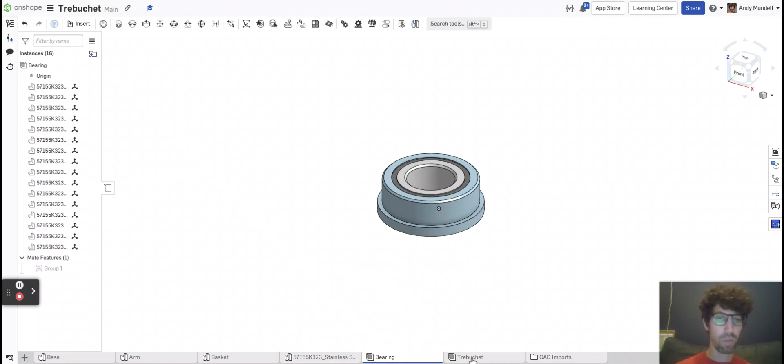We did this when we imported the bearing, but we should also have an assembly that is empty that we call trebuchet. We're going to put all of our parts into this trebuchet assembly. If you don't have one of these, you can click plus and create an assembly and then just title it trebuchet. When you're in an assembly, what you can do is you can insert parts.

So the first thing I might do is I might click insert, and I can see all the other parts in this document. I've got my basket parts, my base parts, my arm parts, and that ball bearing that I imported. If I click this little tab here, I'll see all the other assemblies. I've got the bearing assembly where I put all the pieces together, so I might need to use that later.

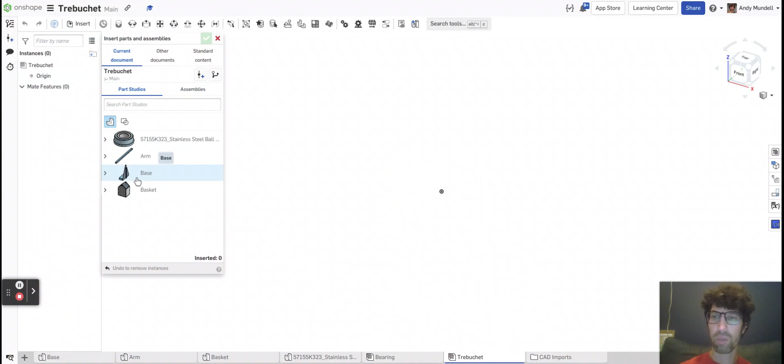So the first thing I might do is import the base. Let me click base, and you'll see it imports all the parts from my base Part Studio. And the way I built them, they are kind of in the right spot.

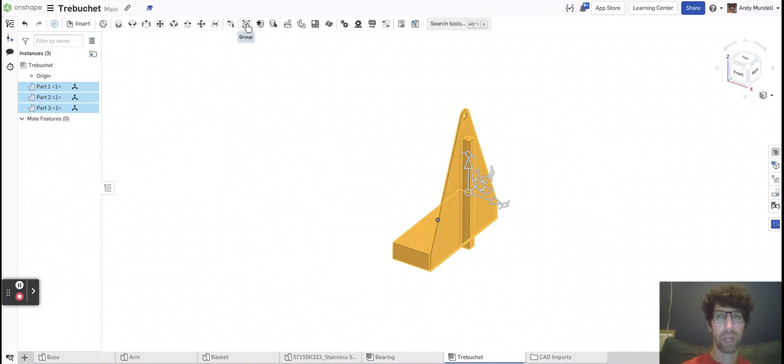So if they're actually already in the right spot relative to each other, you can start by highlighting those multiple parts and selecting the grouping command. I'm going to group those parts, click the green check mark. Now you can see under mate features, I've created group 1, and group 1 includes those 3 parts. So they won't move relative to each other because they are grouped. I can move them, but they won't move relative to each other.

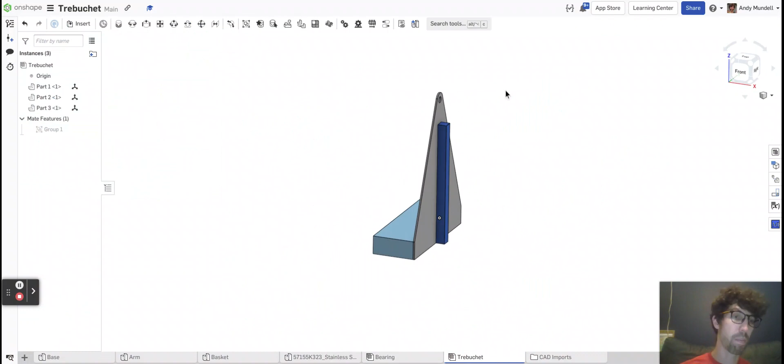But what about if things weren't in the right position when I import them? Let's say, for example, that bearing. That bearing goes right here in this hole that I made in this side piece. So I'm going to click insert, and I don't want to insert these parts because these bearings aren't grouped.

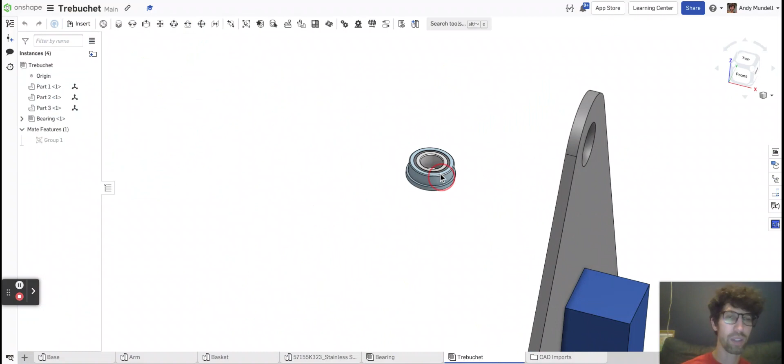I'm going to go to the assembly where I put them together and select the bearing, then click the green check mark. This bearing is now what's known as a sub-assembly, so it's an assembly within an assembly. These parts here, if I click this here, I can see all the parts, but they're already assembled to be a whole bearing. But I want this bearing to fit exactly in this hole.

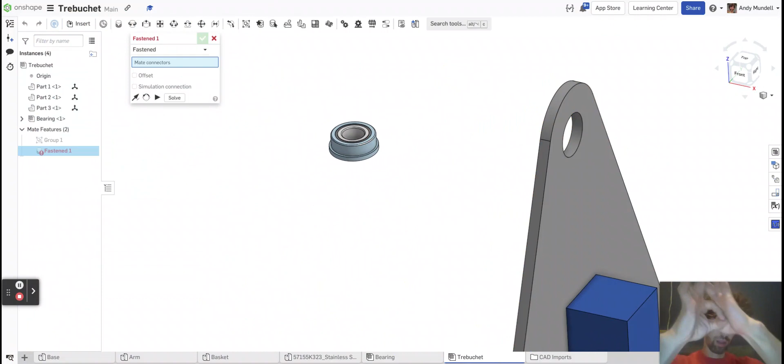So I want to fasten it as if I took it and stuck it in that hole. I'm going to grab this tool here called Fastened Mate. Now what I have to do here is select 2 points that I want to connect. I want to imagine that I'm taking these 2 points and gluing them together. So I'm going to find a point, find another point, and the assembly is going to lock them together.

So you'll see that when you hover over things, different points will appear. These are called mate connectors. And so I want to find a mate connector that would match this outer hole here, and I can imagine this bearing going into that hole. It's actually going to be this surface here, that mate connector. And you can see it's highlighted the center of that circle as the point I'm going to use.

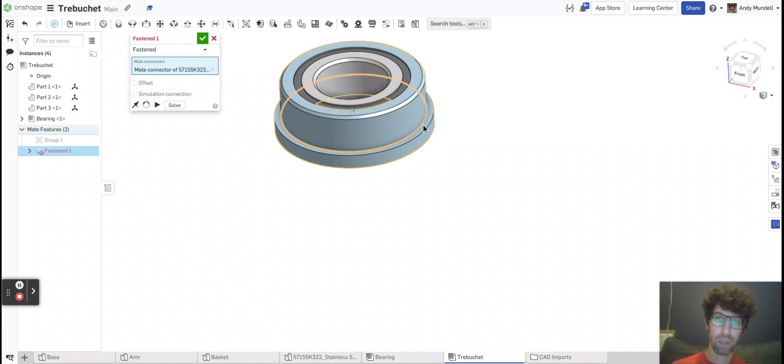So I'm going to click that, and you'll see it selected my first mate connector. Now I'm going to select my other mate connector, which is right out here. I'm going to click right there. All right, you can see it just popped it right in there so those 2 circles overlap.

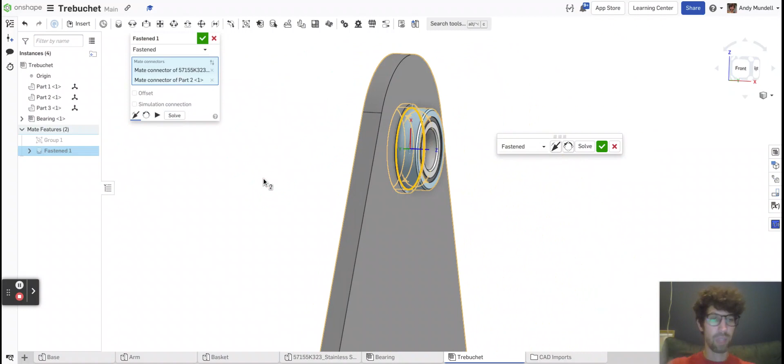Now sometimes when you do this, it works out really nice. That one worked out nice. Sometimes it'll come in backwards. So I'm going to click this flip primary axis button. You can see it's backwards. So it connected those 2 dots, but instead of putting them like this, it put them like that. So I might need to click this flip primary axis.

Now this is something that's round, so if it turns in that space, it doesn't matter. But I also might click this reorient secondary axis, which will help rotate things into position. These are just ways to get it where you want. But once it looks really good and it's where I want to be, I'll click the green check mark. And you can see now I've got that bearing exactly in the hole I want it to be.

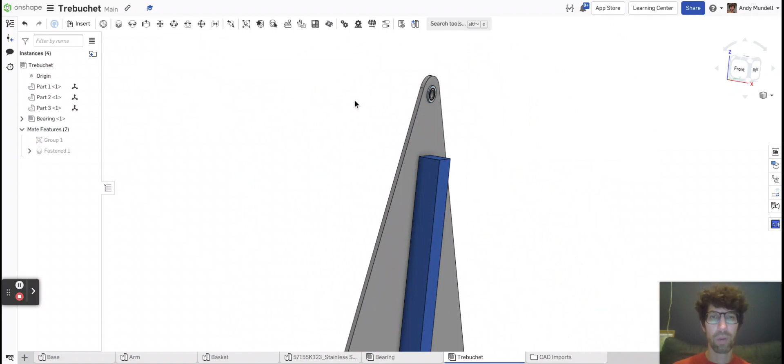And I can continue to bring more parts into the assembly and fasten them where they go. So I can insert parts from my base. Let's say I need the other side. So I'm going to click this down arrow. I need the other part of this A-frame right here, and I need another support piece.

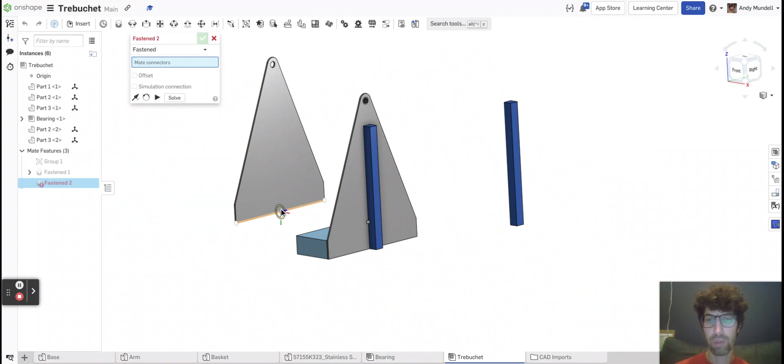So I might go ahead and grab my fastened mate. I'm going to select the bottom right here. I hover over this surface here and kind of, there we go, right there. And I want that to go right here. That looks good. I lucked out on the orientation there. Don't have to flip it at all.

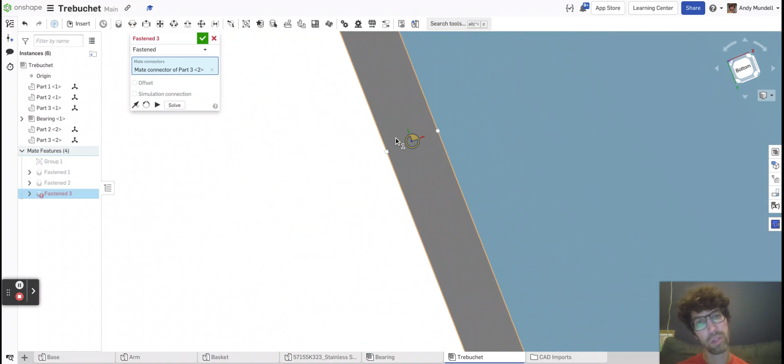And let's do one more. Let's do a fasten mate. Let's do the bottom here, right there. And it needs to be in the center of this one. So let me zoom in. You can see right there. Just like that. Click the green check mark.

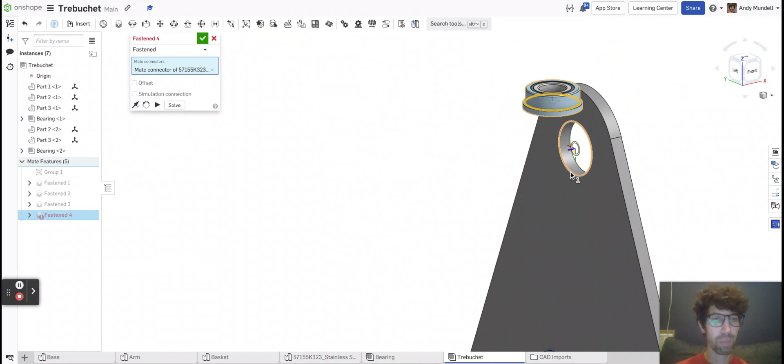Just like that. I'm going to need another bearing. So let's insert under assemblies my bearing. Set it down. And fasten that surface over here. And so this, it's like playing Legos at this point. You're essentially just fastening things to each other.

You can see this is one that came in backwards. I need to click the flip. There we go. That flange. You can put the flange on the inside if you want. I'm putting it on the outside. Click that green check mark. There we go. So I'm starting to assemble it like this.

I'm not going to assemble the whole thing. You might have wheels on the bottom. You've got your axle to insert. You've got sort of other parts. But I do want to show you the arm.

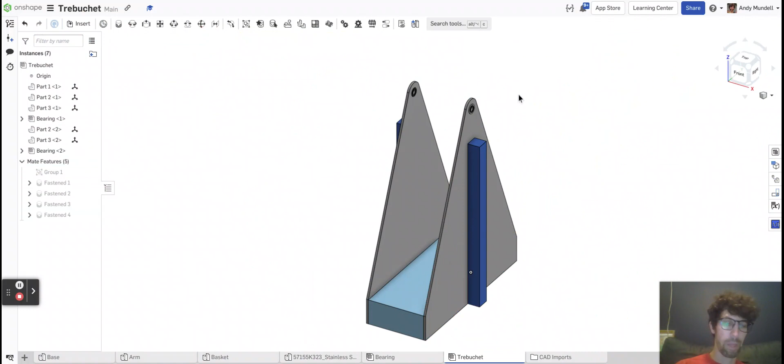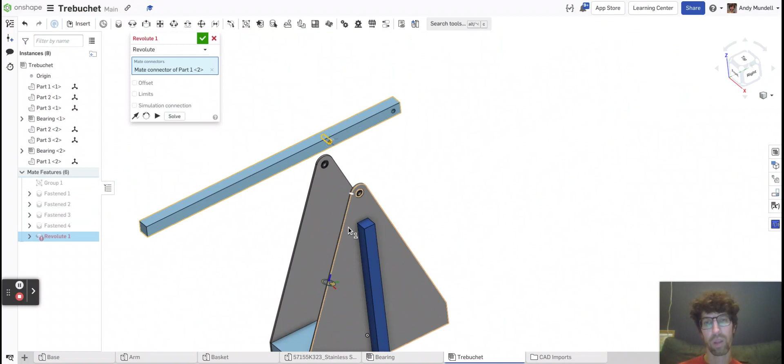Okay, let's go ahead and insert the arm. The arm is different because I don't want to fasten it. I want it to be able to rotate freely. So instead of using this fasten mate here that sort of locks things in place, the one next to it's called Revolute. If I click Revolute, I can now select this edge right here. And I want it to revolve around in this bearing.

Let me go ahead and click here. You see it sort of snapped it to that bearing. And so that's going to be allowed to revolve. I'll show you it in a moment. But first, let's center it. So this doesn't look like it's kind of in the center.

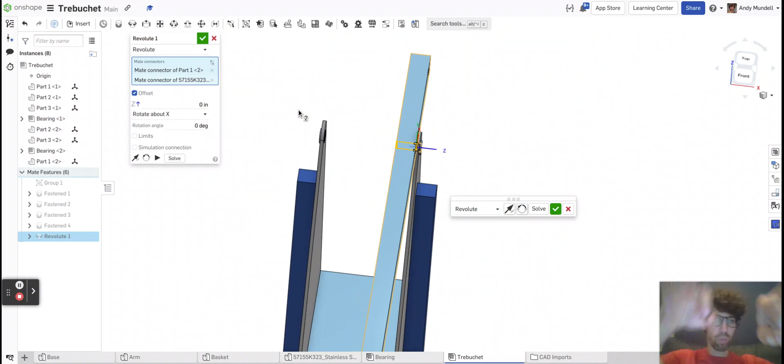So I did that mate. I revoluted it. You can do this with fasten as well. I can click offset, and I can say from those 2 points connecting, let's put an offset. So the offset it offers me is a Z offset. You can see the Z axis right here is blue.

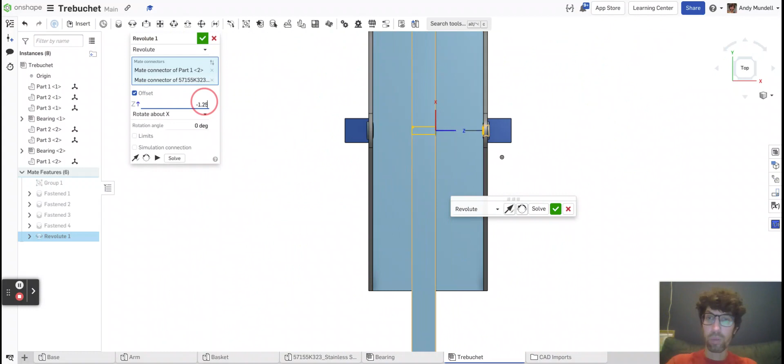I want to send it to the left. The Z axis is pointing to the right. So this would be a negative offset. I might negatively offset it by, let's say, -1 inch. So that moved it back a little bit. All right, so maybe a little bit more. I'm trying to center it here. I can't remember exactly how wide this is. So -1.5, that looks like too far. -1.25, that looks, is that centered? Maybe about centered.

Negative 1.375, that's 1 3/8. That looks right. I'll click the green check mark.

Okay, so that should now be able to rotate around. If I click this, it should be allowed to rotate. Now when I click it, it moves the whole thing. So I do need to maybe lock something in place. This whole thing's just floating.

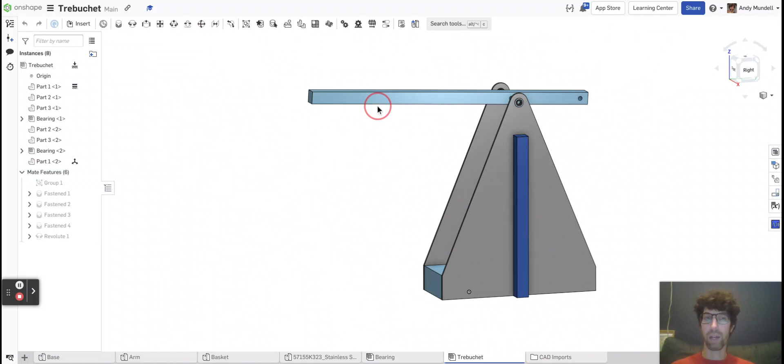If I right click on the base, I can select fix for that base. Now the base is locked. When I try to grab the arm now, it'll pivot up and down because I told it that the mate that it uses is a Revolute.

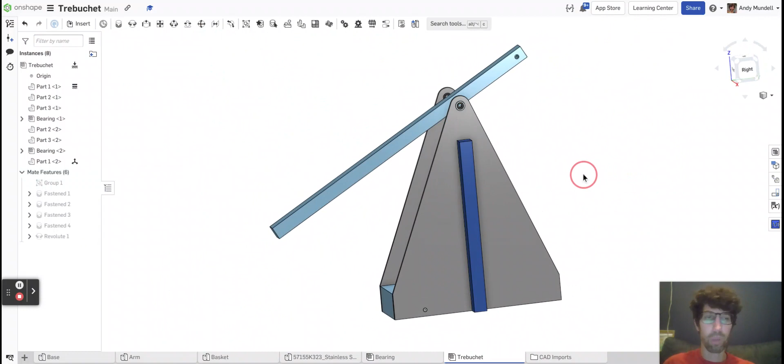So that's kind of how you can do different things. There's Revolute, there's sliders, there's planar mates and cylindrical. There's all sorts of ways you can attach things in an assembly. But that sort of gives you an idea of how this is going to all go together. And ideally, you put the whole thing together in OnShape to make sure everything fits how you want it to before going to manufacture.

One of the beauties of CAD is that you will be able to manufacture this digitally without wasting any resources. Maybe you're not sure if when this swings all the way down, if your basket is going to hit your base or not. So if I insert the basket...

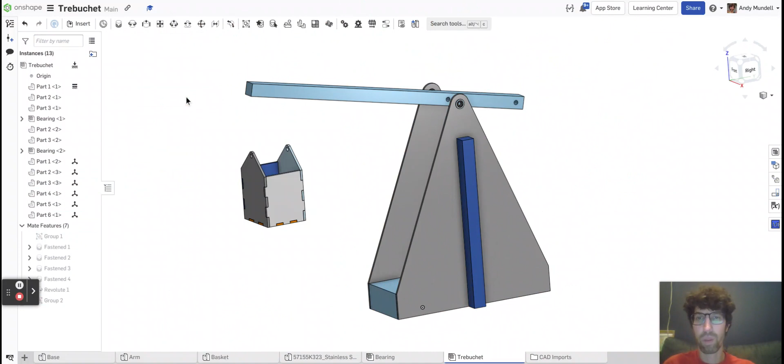Oops, I did not need that center part. Let's delete it there. Let's highlight them and group them. And let's throw a Revolute mate on here.

Doing this a little quickly here so I can show you this. Not working, let's try that again. Right here and right here.

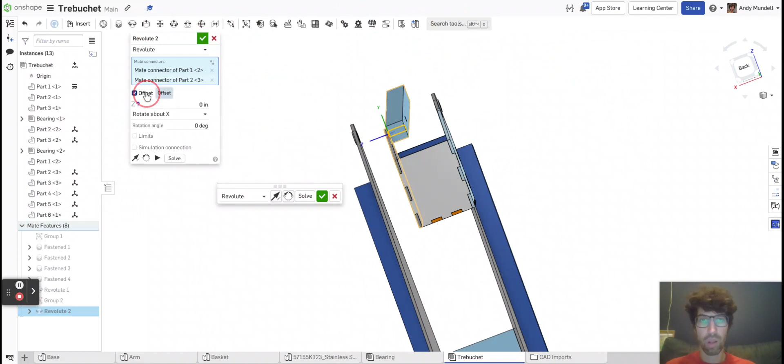This probably needs to be offset by maybe 1 inch, a little bit less than that. Okay, there's my offset. So I've got this basket here.

As I swing this down, I'll be able to see if the basket's going to hit the base. Let me go ahead and hide this part. If I right click on a part in a studio or an assembly, I can hide it.

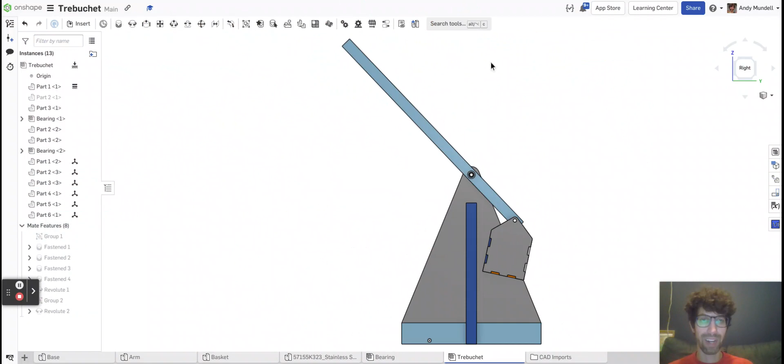And now I can move it down. I can see, oh look, there's a lot of clearance there. There's no way my basket is going to hit. So that's pretty good. And the nice thing is your assembly will update even if you change the parts.

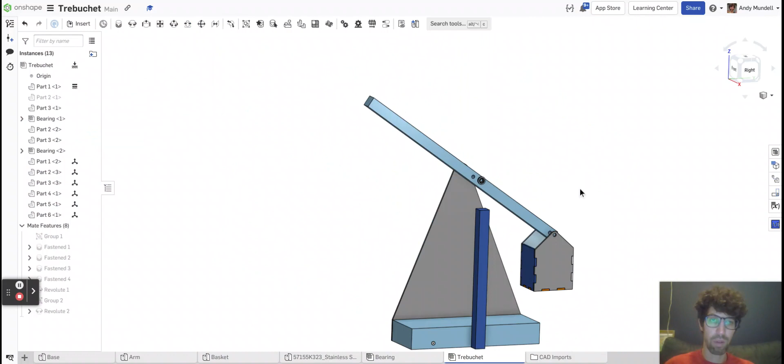So if I go back into my arm and I go back into the sketch where I made the hole, and let's say I move this hole to be 8 inches down the arm, click the green check mark, it moves that hole, and I go back to my assembly, you can see it's moved and it's now showing that.

So now when it swings, bam, my basket is hitting the base. And CAD lets me know that before having to make this whole thing and realize that I made a huge mistake. So I go, oh shoot, it's gonna hit the base.

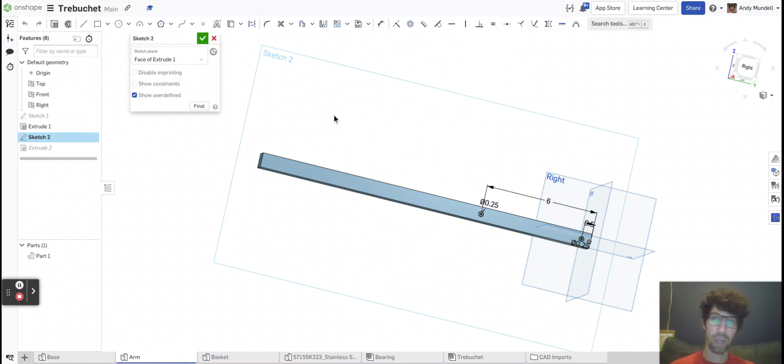Let's go back to my arm. Let's change this instead of 8 inches from the end, let's make it 6. Whoops, I'm not sure I actually changed it. Yeah, I did, okay. And now I go back to my assembly and I swing it through here. Okay, good, I've got some clearance there.

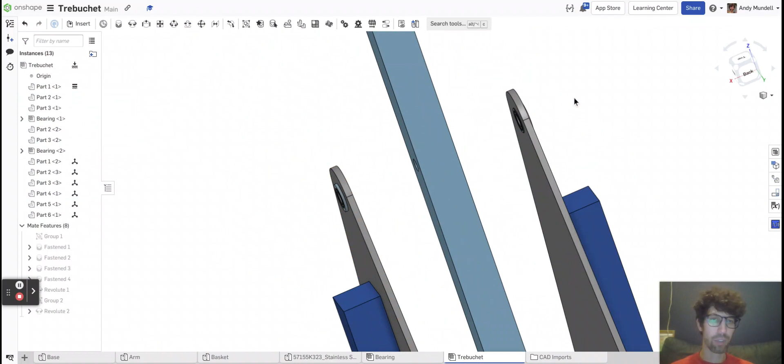So let's bring back this other part, which is that side piece. This is starting to look pretty good and everything is coming together. So you might be adding your little hook there at the end of the arm. You might be adding wheels here. You should model your steel axle that goes through here to make sure that fits, and really just all the details you want in your trebuchet.

All right, have fun putting it all together. This is where it really kind of becomes real right before we start assembling on the laser cutter and using the saws and other parts. So have fun.